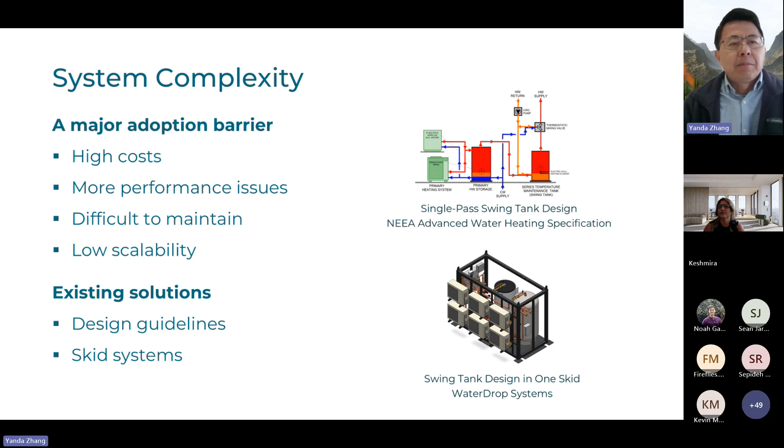There are two types of solutions that I see currently trying to address this issue. One is to have comprehensive design guidelines, especially the ones like NEEA has developed, and AWHI also has an effort to develop some similar design guidelines as well. The other approach is to have a skid system that has all the different components packaged together. For example, I'm showing here an example, the skid system provided by WaterDrop. I think both solutions have definitely made a huge impact on the adoption of central systems.

So what we'd like to have is another kind of solution here, what we call the locus flow router. Locus stands for load optimization control using storage. The concept of this flow router is similar to an internet router, and we're all familiar with that device. It makes the internet connection much simpler. All we need to do is connect all the devices and computers to a router, and the router manages all the data flows and things are connected. Very simple, so similar concept here.

What you can see in this diagram is that we have a locus flow router, basically we're routing flows. The system can be established simply by connecting heat pump water heaters or other heating equipment and hot water tanks or other types of thermal energy storage to this flow router. It's kind of plugged into this flow router, and then the flow router is going to manage the flows among those equipment and establish an overall system operation.

Each flow router also has control and connection to an IoT-based cloud system to manage data. And each flow router can receive grid control signals directly from the source or through this IoT system to make the system achieve load flexibility. So this is the overall concept, a way of trying to make the system architecture simpler and also make the system more versatile.

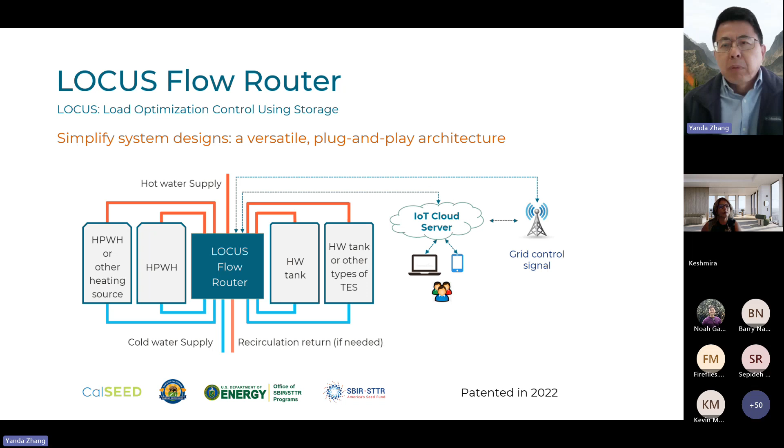What you can see is that it's not limited to one type of design, and you can have a mix and match of heat pump water heaters or other heating sources and different types of storage equipment. So this is our approach to achieve a kind of plug and play system design.

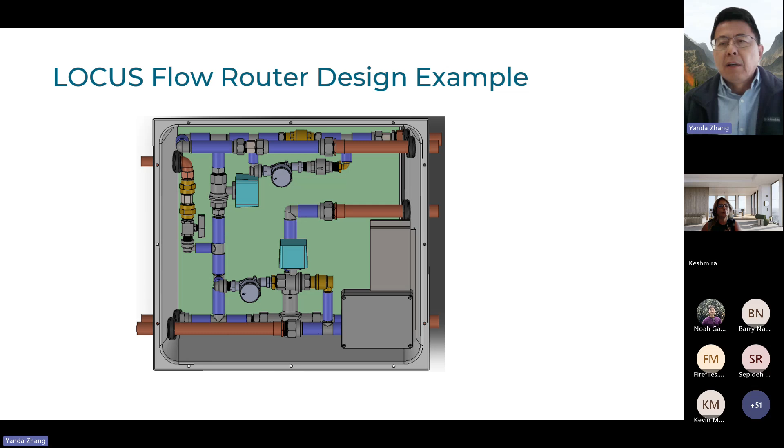Here is an example of a flow router showing what's inside. Basically, we have some electric valves and pumps, strategically designed in a way that we can achieve versatile flow management. We also have a custom-made controller powered by a microcomputer, able to manage the operation of pumps and valves, and overall to achieve the flow management.

So now, with this configuration, what we'd like to achieve is what we call system level control, to a degree it's more towards a system level of thermal energy storage management.

I'm showing a couple of diagrams to give you the concept. We can have one system operation mode such that hot water is transferred from the heat pump to the storage. This is a charging process for the storage.

We can have another operation mode by changing the valve and pump configuration inside the flow router, such that we only use the storage to meet hot water demand. We can also have an option mode that only uses the heat pump to meet the demand, saving the hot water storage for later, for example a peak period.

We can also have the storage idle once it's empty, so that we can later use this empty storage to trigger more heat pump operation during the period when the price is low or renewable energy is available.

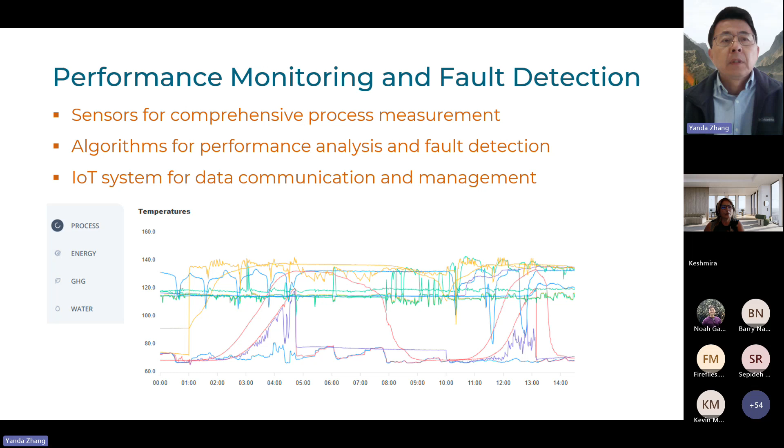With all these features and capabilities, the value we want to provide to customers and partners is really about reducing cost—both upfront cost and operation cost. With this simplified diagram and architecture, we hope to make the design, installation, and commissioning process all simpler.

From a designer's and installer's point of view, the architecture is very easy to understand. The designers only need to focus on equipment selection and sizing, and the plumbing and connection side will be mostly achieved by what's inside the flow router.

On the operation side, the optimization algorithms and the performance monitoring and fault detection help us reduce operation cost over the long term. In addition, this architecture helps increase the scalability of central systems and helps us achieve the goal of reduced greenhouse gas emissions, with impact delivered through the advanced control that we have.

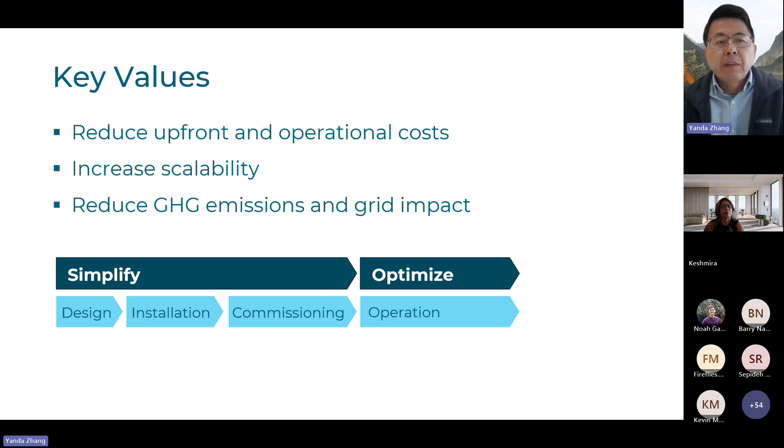So now I'd like to show you some examples of what's happening in the field. Supported by a CEC EPIC grant, we demonstrate this technology in 3 buildings. The whole project was led by Redwood Energy and also supported by Ecotope, and we basically provide the technology.

So there are 3 types of buildings. The first one is 14 units. They have 1 Sanden heat pump water heater to serve 7 units, and another Sanden serving another 7 units, so 2 systems total without a recirculation system. What we retrofitted is to include a flow router, the whitish box you see here, and add additional storage per Ecosizer for achieving load flexibility.

The second system is a building 3 stories high, but this building uses a kind of clustered heat pump water heater system design, such that they had 1 Rheem 65-gallon heat pump water heater plus another Rheem storage tank 80 gallon, forming a small central system serving 5 to 6 dwelling units. There are basically 12 of those small systems inside this large building.

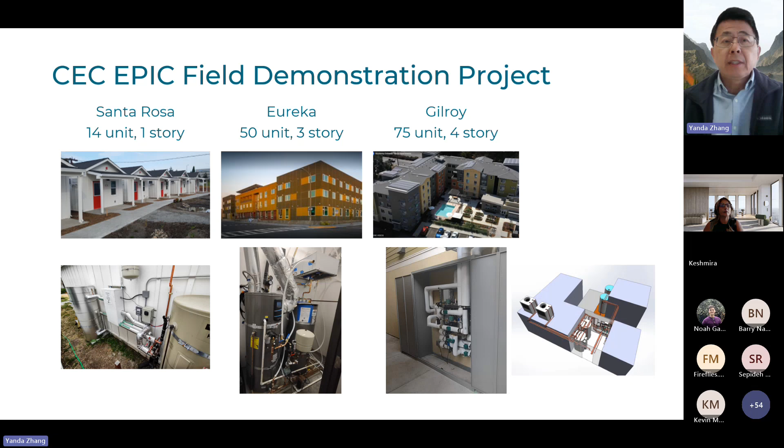So the result here, for the first example, small building using Sanden heat pump water heater system. First test is using a time-of-use rate provided by LBNL. The baseline, solid blue line and orange line, shows there's some energy used during peak hours, and with locus flow router, the dashed line shows the peak energy consumption was significantly reduced. From a cost point of view, this is not the real utility cost, but based on this testing rate, the overall cost reduction is 71% or 75% among those two systems. This result is published in one of the ACEEE summer studies.

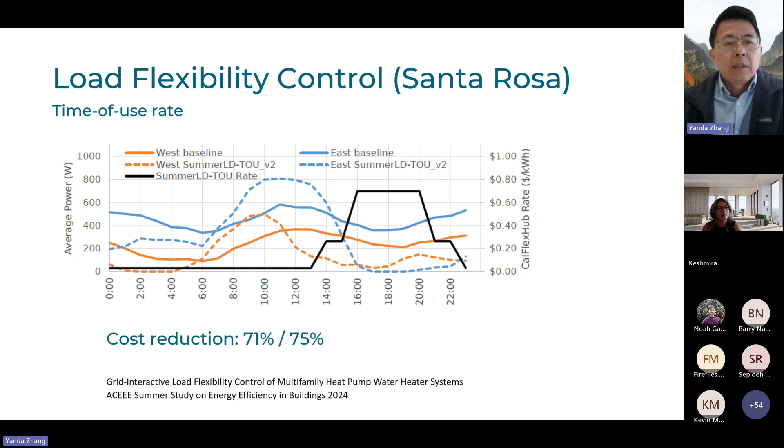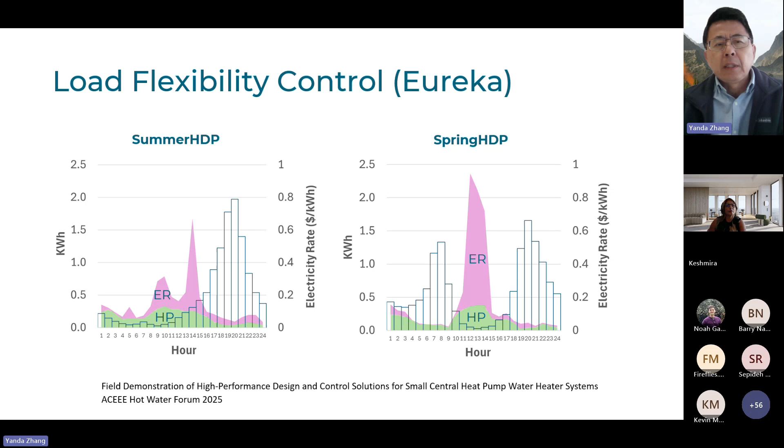Another example shows LBNL's spring rate, which is pretty much our current time period, springtime. During the middle of the day, the price is really low, so heat pump and electric heating was significantly increased to increase the storage. This result is also published, in one of the presentations from the ACEEE summer study that just happened last month.

Another example I'd like to show is that this is not necessarily the core control function of flow routers, but flow routers can also provide improved recirculation control, which turns out to be very useful for certain situations. For the Eureka case that I explained, with cluster systems, because the overall system is very small, it was more feasible to use recirculation controls. In fact, the site had recirculation control, it just sometimes didn't work very well.

So what we're showing here is that with locus flow router load shifting, which reduces peak hour energy consumption, and also improved recirculation control, we significantly reduced energy use—almost 50% energy use. Most of that was actually through recirculation control, not through the load flexibility control.

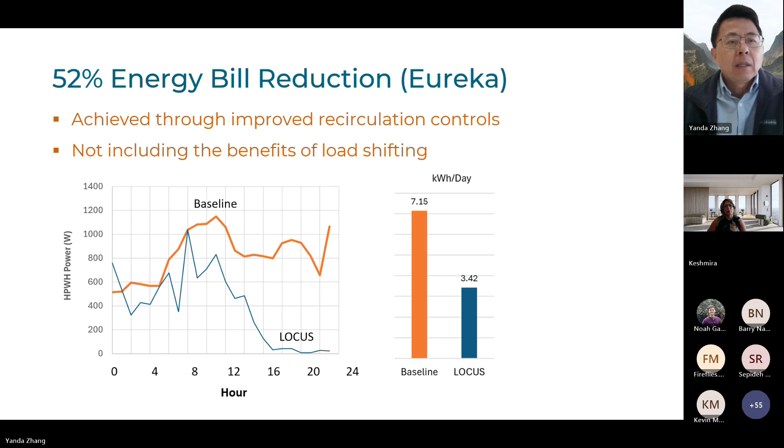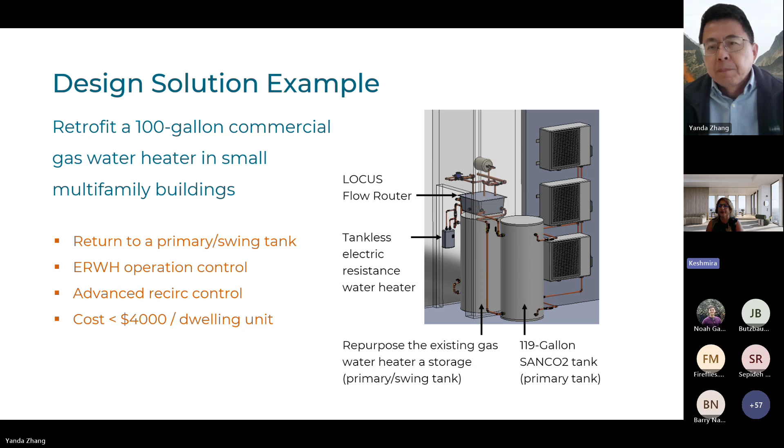Yes, I kind of explained it. All our flow routers have a default mode, but that's not necessarily what you see. The default is basically saying there's no control, the system doesn't run the control at all, but people will still get hot water. This is not necessarily the so-called baseline, because the baseline for an existing system is whatever the existing design or the installer came up with, not this default. But for the CEC study, we did install the flow router in a way that can be completely bypassed, therefore becoming the default mode or the original baseline mode.

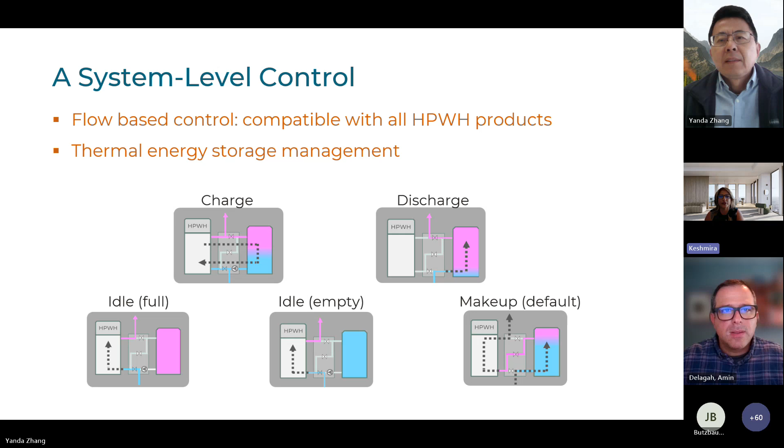Amin, are you ready? Yes, I am. Okay, let's move. You want to take control and move forward in the deck, or would you like me to try? Let me see if it's allowing me to advance. I can get to the slide here.

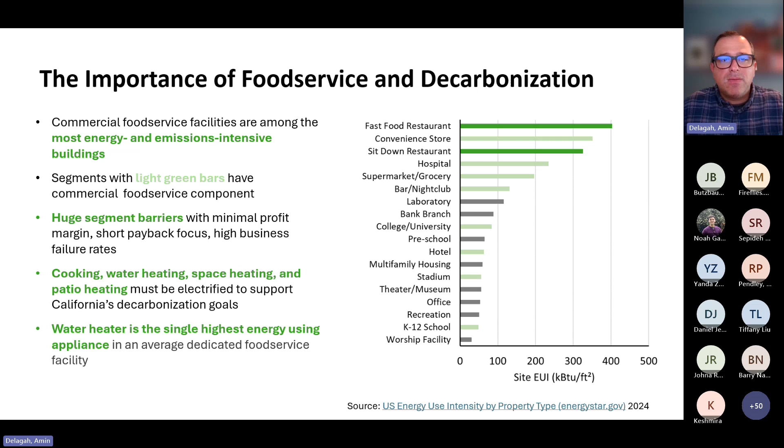When I was in the lab, I used to say that even though we're very much cook-line focused when I was working at the Food Service Technology Center, per appliance, water heating is the single highest energy using appliance in the average restaurant. So that certainly is the case.

There's lots of sanitation going on. Some of the early research we did really kind of got us going. About 25 years ago, we started looking at the water heater, and over time, we realized there's a lot more going on here - we needed to look at the recirc system. It just kept expanding to really understand that the water heater is really a system and that there's a lot of things we can do.

Some of the things that were really exciting: in 2018, we did our first full-service restaurant recirc system project. The tankless heaters at that site were not working well with the recirc system. We were able to size down the recirculation system and also add demand controls.

We also decentralized the bar and the bathrooms with point-of-use electric, and then put in a heat recovery dish machine that worked off the cold line. All those things allowed us to size down the recirc system while maintaining the condensing function of the gas water heater. It was our first case of decarbonizing hot water systems and also electrifying hot water systems.

That led to me moving on to the PG&E labs and working there doing testing on heat pumps in the laboratory. About that time, in 2021, I recognized that there was a huge barrier for decarbonizing past residential spaces into food service. One of the biggest barriers we highlighted was the health department barrier to heat pumps, and we can get into that in a little bit.

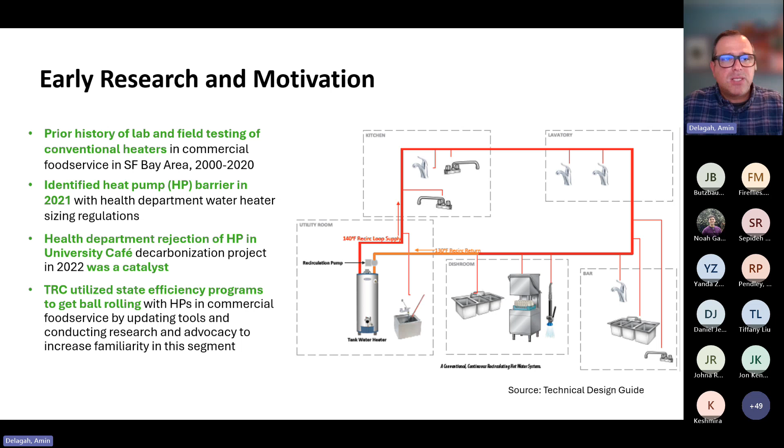We saw firsthand that there was a significant barrier there, and we were hearing more and more about rejections from the health department. So that was really the big catalyst, and we got some efficiency programs involved and worked with CalNext specifically to fund some research.

We've completed some of these projects, including the market potential for heat pump assisted hot water systems. We also developed a technical design guide, now in its 3rd edition, and completed a master mixing valve project. Those are some resources for folks to check out, and we can talk a little more about them.

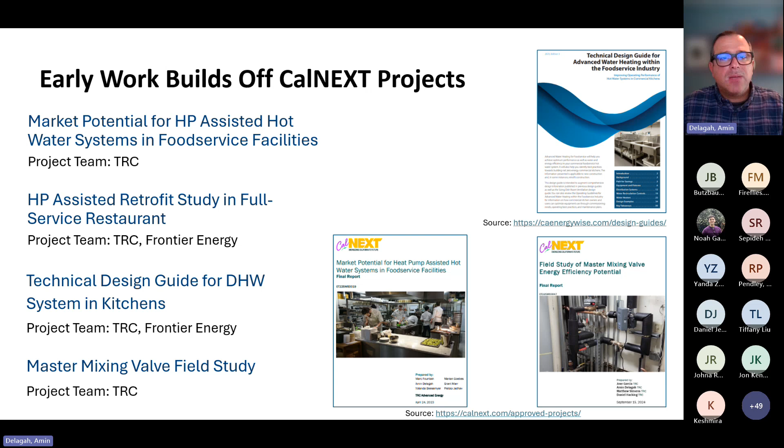One of the first projects was this market potential study for heat pump assisted systems. We utilized CEC research showing that California is 90% gas, 10% electric, with the biggest loads in sit-down and fast food restaurants. That's changed since COVID—there are fewer sit-down restaurants, and fast casual is emerging as a new segment between fast food and sit-down.

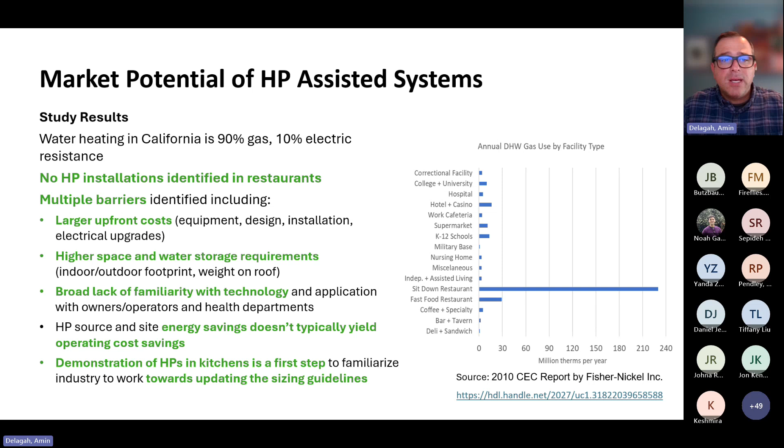This market study highlighted a significant number of barriers—upfront costs, space and water storage requirements, and a broad lack of familiarity with the technology. And the site energy savings don't typically yield operating cost savings for the facility here in California. So there's a lot of work to do.

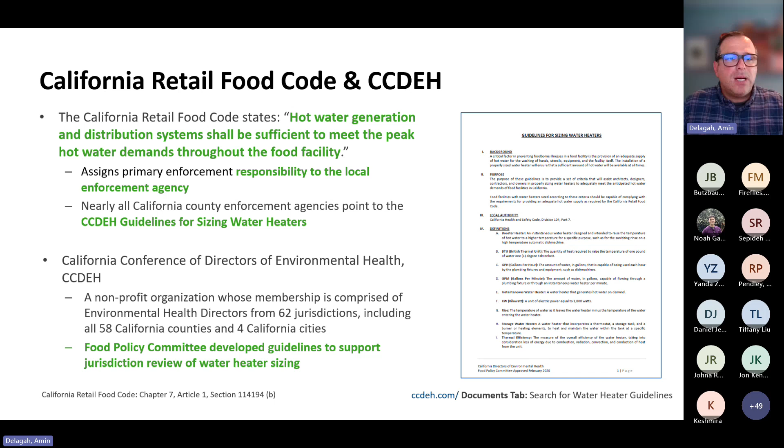We really wanted to focus on our biggest barrier: we just can't get heat pumps into food service, and that's because of the health department. This isn't just in California—we later learned in a study we're working on now that this is really across the nation. There's no path for heat pumps into the food sizing guideline, so that's what we're working on.

Currently there are 2 formulas—one for gas water heaters, one for electric resistance—using a fixed value of 0.98 for thermal efficiency, and there isn't one for heat pumps. In the simplest form, we'd be oversizing by up to 400% using their current equation, and that's only if the county or municipality allows heat pumps in the first place. This is the only equation they have to apply.

There are other issues—current sizing guidelines don't account for hot water storage capacity, which is fundamental to how we design heat pumps. We want lots of storage and smaller heat pumps because that's most affordable and efficient. So there's just a disconnect there. It's a good study.

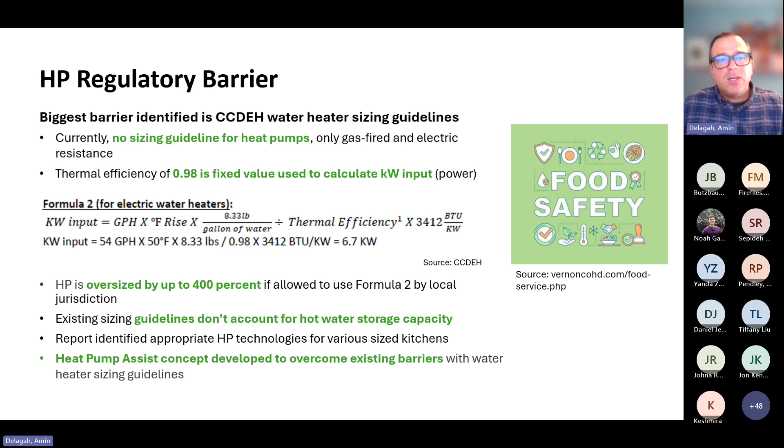We did highlight heat pump assist as a way for restaurants to add heat pumps now. Despite the barrier, they can move forward by adding a heat pump assisted system, developing a swing tank system. For illustration, their existing gas water heater can become that swing tank, ensuring the recirc system has hot water and good backup, while taking a lot of the scrutiny out of sizing the heat pump for the facility.

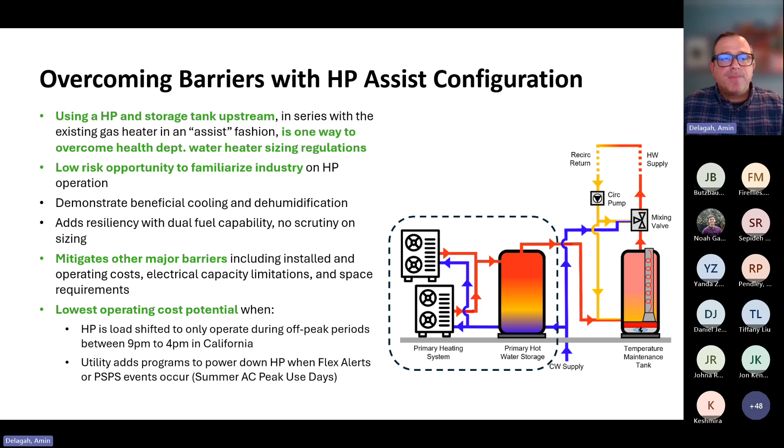It could be sized down based on space and electrical capacity requirements, and designed to run very high duty cycles. Other benefits include designing it to turn off during peak periods in California from 4 to 9 p.m., operating the other 19 hours of the day. There are opportunities here—of course we want to fully electrify, but this is a way in while we still have that regulatory barrier, and a way of addressing existing facilities that will have a hard time transitioning fully to heat pumps.

The other solution we highlighted: even though we don't have a heat pump sizing guideline, we have very large hybrid water heaters with large electric resistance elements—an 11.3 kW, 208 volt electric resistance element—that would work for a cafe and maybe some small quick service restaurants. So we have solutions right now that could be utilized at facilities, and they're starting to be, but familiarity with the health department to allow these units is still a hurdle.

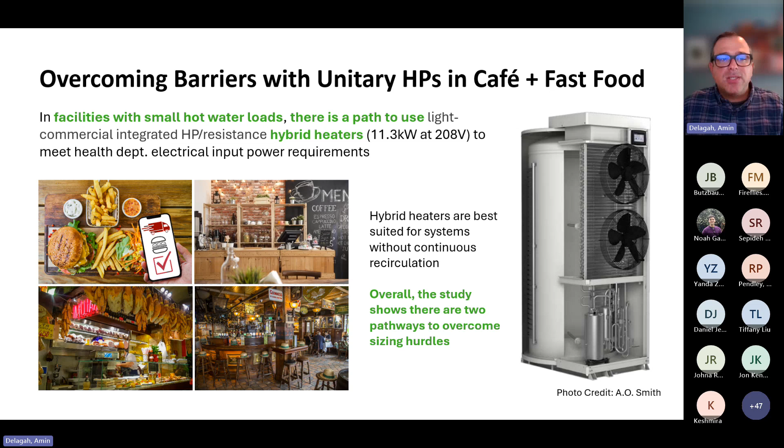That was one of the first studies we looked at, and it got the discussions going. As mentioned, we also updated the design guide to include heat pumps. We have sizing examples in the back, and we talk about water heater cost and footprint using California rates.

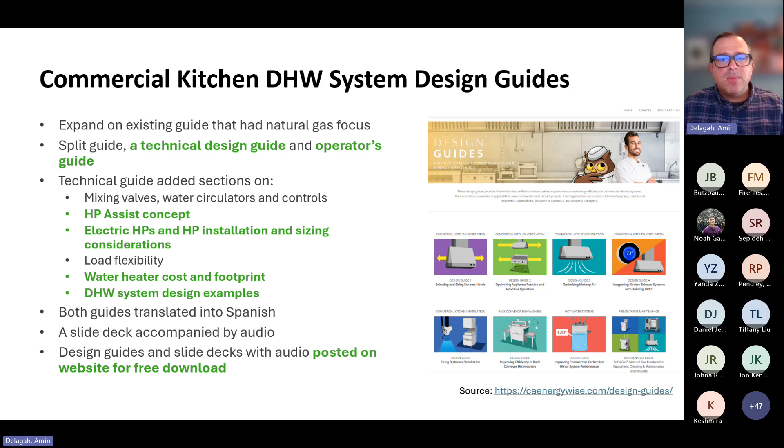And it does also get into load flexibility, mixing valves, water circulators, and controls. It's available free to download from the California Energy Wise website.

So moving on, we are working on a heat pump assist project. This was kind of the next level of the one we did with gas that we talked about earlier. It ended up being a very challenging project. We looked at like 300 sites, and we were only able to find a very small fine dining site. As we've been working with that site, we've had some challenges with getting a heat pump installed in a really old home, I guess you could say.

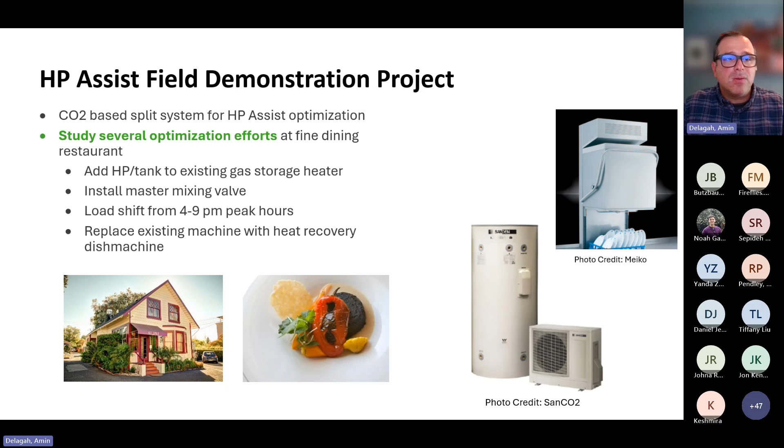We also weren't able to move forward with installing the heat recovery dishwasher, just from the typical nature of this facility and the dish room. So we will still do some of the goals of this project, but the original goal was to decentralize the dishwasher, turn down the temperature of the system, which reduces the distribution heat loss rates, and then basically utilize a heat pump to electrify a lot of their hot water loads, while still relying on their existing gas water heater to make sure we meet their full load, and also to make sure the health department allows us to move forward with this project. So that's still going. We'll get some results.

If you want to look at some of the presentation at the ACEEE Hot Water Forum, there are a couple ones, 2C and 4C, that talk about this project in more depth. Also feel free to reach out to me if you have any questions.

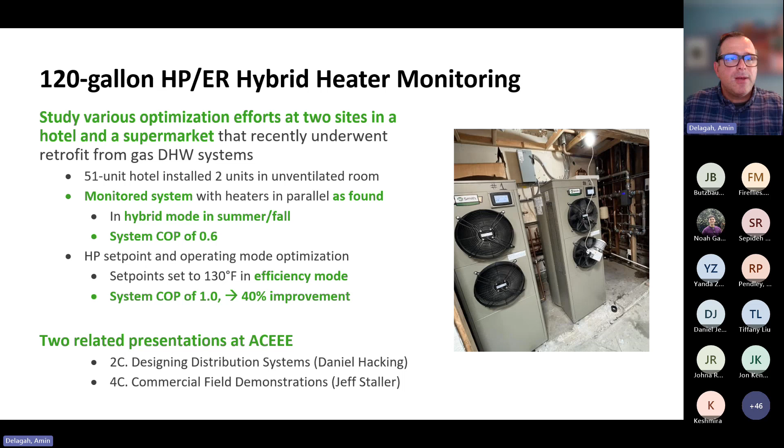So coming back, we do have kind of a feather in our cap, which is that although we have all these hurdles, especially this health department hurdle, maybe we can expedite some of this. One of the ways that's happening in California is that there are new air quality management district rules. These are in place to really reduce and prevent our exposure to unhealthy air, including NOx and PM 2.5.

The air in Southern California, Northern California, in many portions, especially in wintertime, can be more stagnant, and our air quality index does start to increase significantly, especially when those gas furnaces kick on in the wintertime. So the biggest news here is in South Coast, starting January 1st, 2026, with new buildings and major alterations, practically the biggest units in most restaurants or food service facilities, up to 400,000 BTUs, they will be zero NOx, and essentially gas will not be allowed as the water heater type for new construction.

And later in 2029, that will kick in for existing buildings when their water heater burns out—they will not be able to purchase a gas water heater. So that's the biggest one.

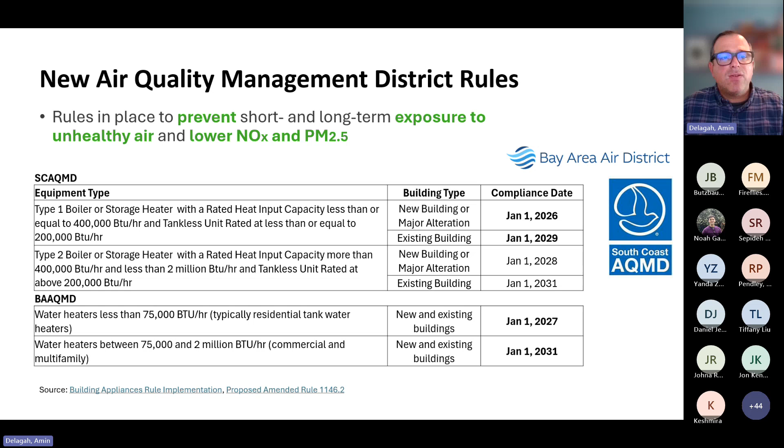In combination, the Bay Area, which is also a large portion of the state, starts with residential-sized heaters, which you do find in commercial spaces like cafes and quick service. That kicks in 2027 for new construction, but the biggest kick-in is in 2031, where all the other water heater sizes are incorporated. So essentially by the 2030 timeframe, the majority of California will have to transition to electric water heaters—in fact, 60% of the population, but only about 10% of the total area in the state.

Well, why does this matter? There's currently no path for heat pump water heaters in restaurants. We can talk a little bit more about that.

We did bring the South Coast District together with the health departments in Southern California. What we realized was that when they passed those rulemakings, the air quality district never actually talked to the health department, or really looked at the food service sector, which is kind of surprising.

And when they started talking to each other, there was definitely regulatory versus regulatory. One of the responses we got is, well, if we don't trust these heat pumps, we're just going to require them to have electric resistance. So what that showed was that we have a lot of work to do to get the regulatory agencies to talk together, but also to really improve, have demonstrations, and get into restaurants so we're ready for these regulations to kick in California.

Otherwise, we're going to have exemptions, as we have had similar exemptions with reach codes and other gas bans through the state, more at the city level. And we really want to avoid that for these air quality district rules that are coming in. If restaurants had to switch to electric resistance in California, that'd be a 6 times increase in their hot water bill, which they might be paying $50,000 a year with their gas water heater currently. So that's a significant increase for these larger full service restaurants.

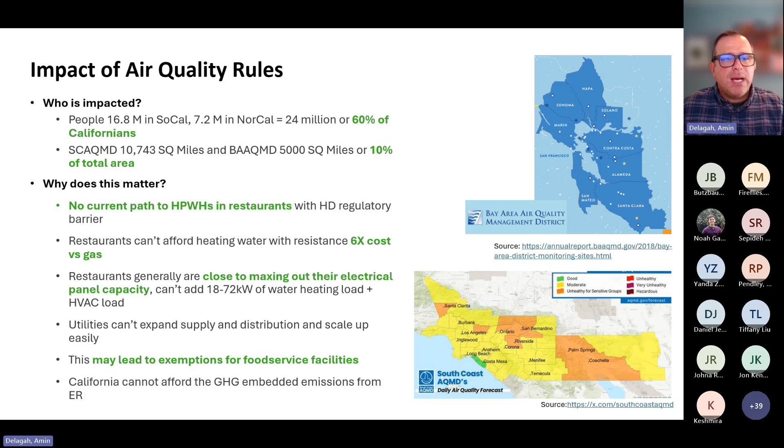So let's keep going. But the motivation here is it really helps us expedite these sizing guideline revisions. It expedites doing more lab and field research and demonstrations, and it expedites getting the industry more familiar with this technology. And what I hope it also does is expedite some product development suited for restaurants.

What I mean is these heat pumps are not suited for the indoor application. They don't have filters suitable for the grease that's in restaurant air, and they don't have the ducting to really help utilize the cold air coming out, which we could use to cool kitchens. So if we can develop the right type of heat pump water heater products, some of the additional benefits—especially now that we have OSHA in California really looking at making sure people don't overheat in kitchens and other facilities—it can address several needs at one time.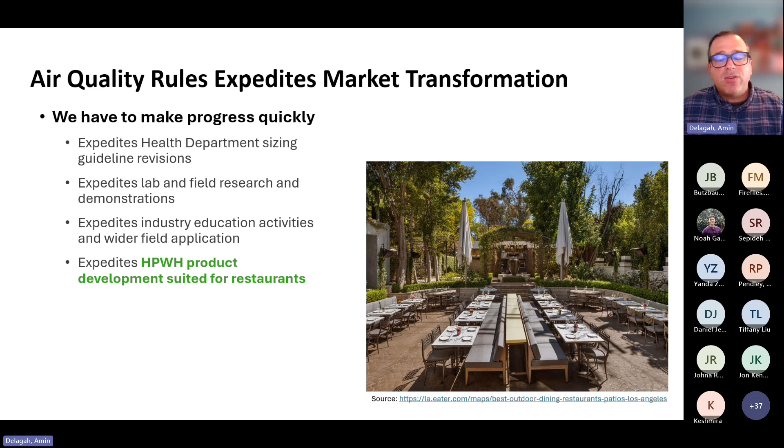Moving on, because we're a little over time. We have a bulletin developed—San Francisco Environment took the leadership there to develop this bulletin. We do have some health departments that are allowing variances if you monitor your system and share that information with the health department to install heat pumps.

And we're also really collaborating, especially in Northern California, with the various health departments, SF Environment, and now New Buildings Institute is part of that, and it's expanding significantly. Also on the side, TRC and others are working with health departments in a focused roundtable to update the sizing guidelines to allow for heat pumps to be utilized in food service.

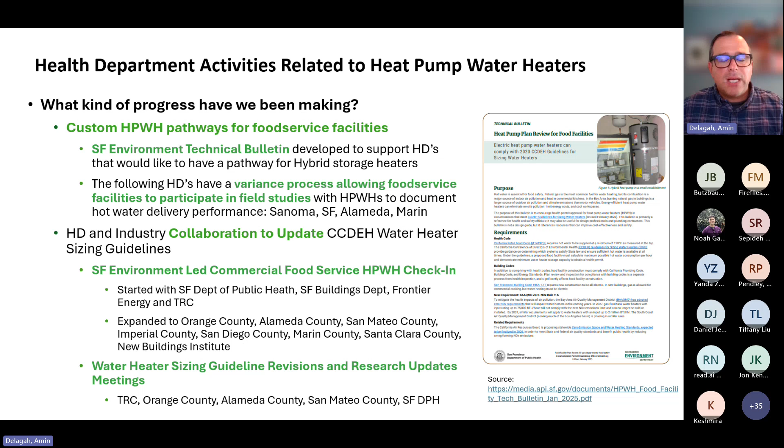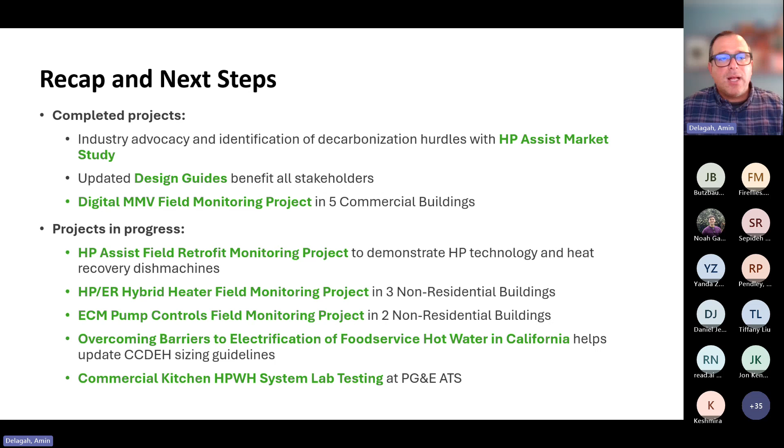Just my last slide—some of these studies have been completed. We're progressing with a number of studies moving forward, namely lab testing of heat pumps to mimic restaurants, and also some code readiness projects where we're actually monitoring heat pumps in supermarkets and hotels. That's kind of really exciting, and NBI is also doing a huge project on that as well. So a lot more to come on this.